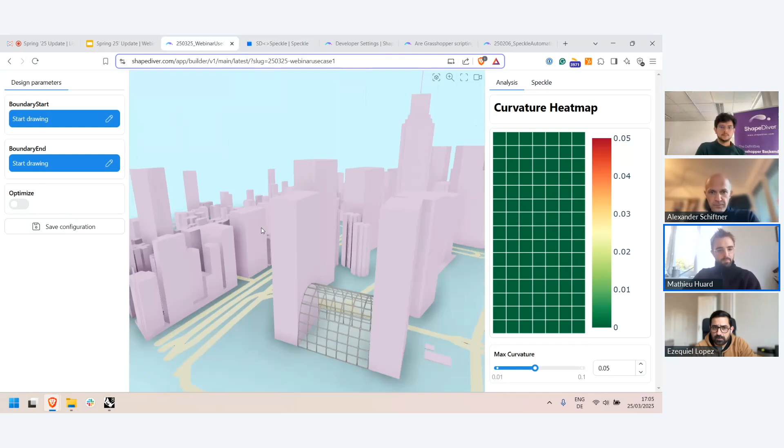So I'll get started with our first example. Here I tried to put together a lot of the things that are new in the last 6 months and a bit more in ShapeDiver. As I was finishing this example, I realized that even though it's a silly example, I hope it conveys all the possibilities we have now. I was actually blown away by how much is now possible just using Grasshopper and deploying the logic as a web application.

In this small application, what I have is this city model with a small pavilion between two buildings, and there are several design options which all revolve around this tensor structure optimization. This pavilion is defined by two curves on the buildings, and as you can see here, I have point inputs which allow me to edit the two boundaries of my pavilion, changing the shape pretty significantly.

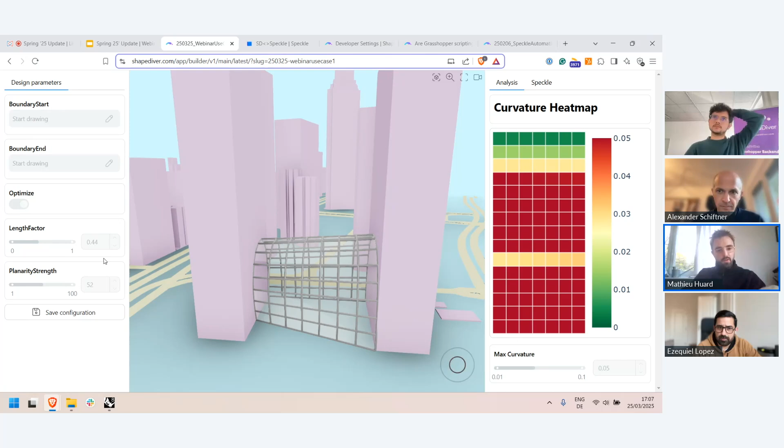And I have an optimize button which unlocks — as you're probably aware, App Builder allows for contextual interfaces — new parameters that are part of my model, which are optimization parameters, where I optimize for the pavilion to be a tensor structure. So I can play a bit with those parameters, and as I play, what I did here is add an analysis tab, which provides a heat map of the planarity of all the glass panels of my pavilion. As you can see, as I update those parameters, we have different heat maps for the planarity of panels.

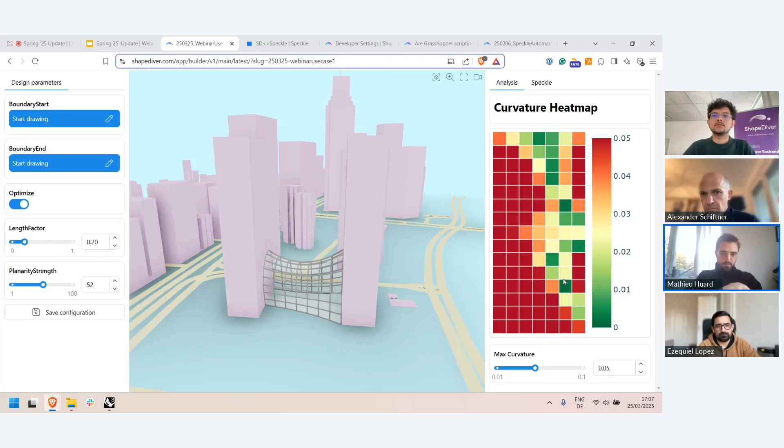And the last thing I have here is, of course, the Speckle part. So essentially, through this design app, I can design a structure which I can then export to Speckle.

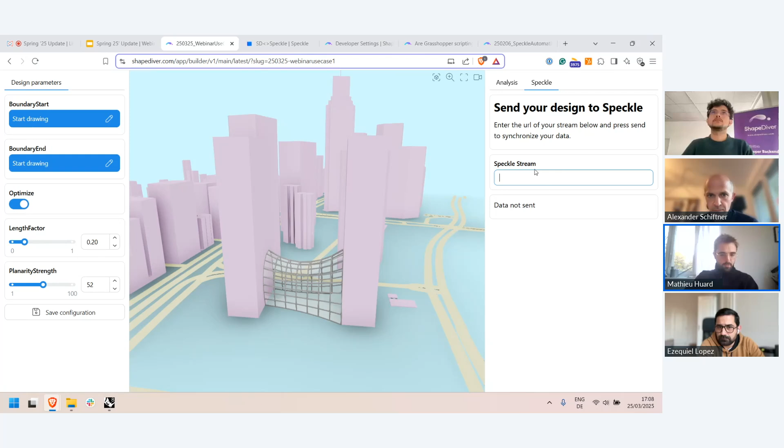And that's in my interface here is done by just giving the address of a stream in Speckle, and then I'm able to send data here. So I'm already going to do this, which will close the presentation of this model, and then I'll go to Grasshopper to look a bit at the details of how all of this is implemented in Grasshopper.

But yeah, the first thing is that here, I'm not sure how familiar all of you are with Speckle, but essentially what I can do in Speckle is have these models, and a model can be updated. So essentially there's data that can be synchronized, so imported from all the connectors that Speckle has or exported back to those connectors, which allows, of course, for interoperability and collaboration on projects.

And in my case, if I create a new model that I call Pavilion, I can then copy the link of this model called Pavilion, and I can go back to my app here, enter the link. My definition checks that this link is valid essentially, and then lets me send data to the model. So a new version, you can send different versions to models.

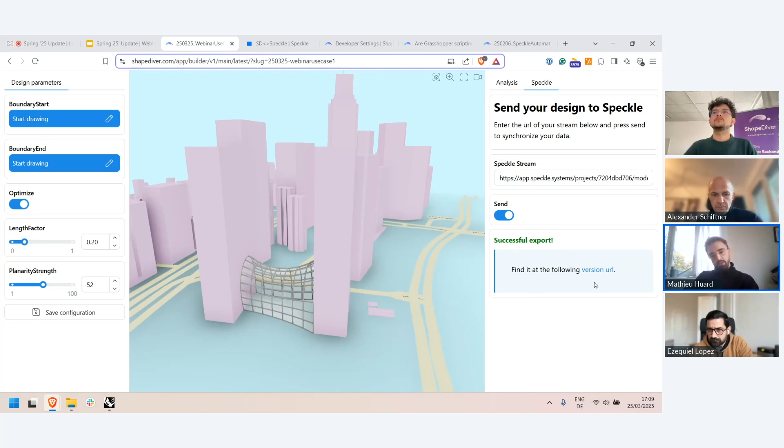And once this synchronization is complete, I can go back. Well, I can directly click here. Essentially, I get in Grasshopper also directly the URL. I'll go back to my dashboard, and I can see here that my model updated with a new version of the model, which is here. I just exported the metal structure of the pavilion. Okay, so that's essentially what this first example does.

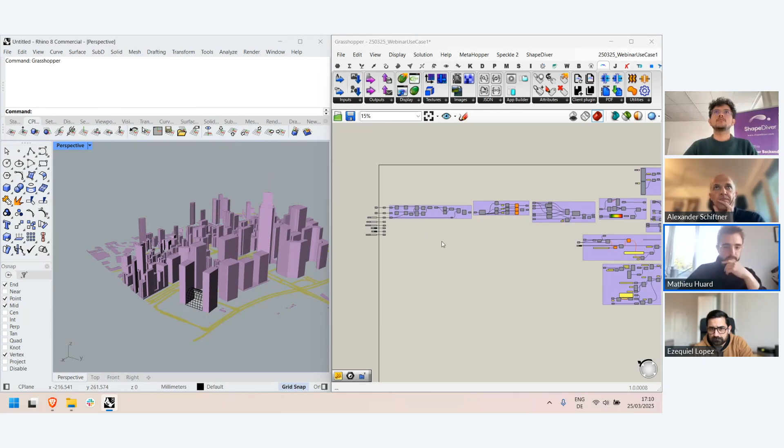And now, if I look a bit in Grasshopper, we can see my definition, which I try to organize as much as possible. And by the way, it will be uploaded to our help center after the webinar, so you'll be able to start from this definition and look at how everything is done here. But essentially, besides the main algorithm here, which takes my curves, designs the pavilions, and then uses Kangaroo to do the optimization, and then displays the end results, right? So here I have my pavilion, here the environment geometry.

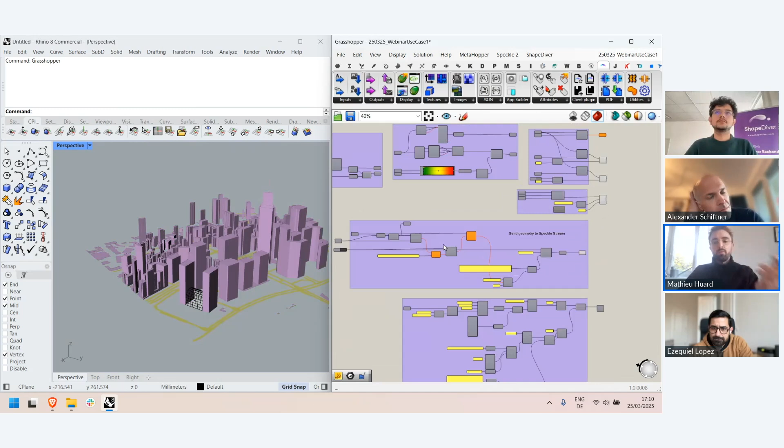But what I wanted to start by showing is the Speckle part, right? So there's a couple of important things to note about Speckle. Speckle is currently in a transition phase, and they're upgrading all their so-called connectors to new versions, version 3. But if you go here in Speckle and you look at the resources, so connectors, you'll see the list of new connectors that can be installed, but the new version of the Grasshopper connector does not exist yet. So right now the connection works with the legacy connectors.

So on this page, there's a way to go to the legacy connectors, which work with this manager. So if you install the Speckle manager here, which is what I have already installed, you'll see the list of the legacy connectors; some of them will last longer, probably some of them will be replaced soon. I think Grasshopper will take a while still. So for now, installing the version 2 of the Grasshopper connector is what's needed for the connection. Of course, as soon as the new version is out, we're going to update our servers and support it as well. But now, if I look at Grasshopper, once I've installed this connector, I can see the Speckle plugin in Grasshopper. And this is what I need to synchronize data.

So again, some of you might already be familiar with the Grasshopper connector of Speckle, and then you know that you probably use the send and receive components in Grasshopper to send data to Speckle models, or retrieve data from models. But as you might know, those components are asynchronous, and also have this interface with buttons. So essentially, you need to interact with the canvas in order to send and receive the data inside Grasshopper. So they're only useful for local work.

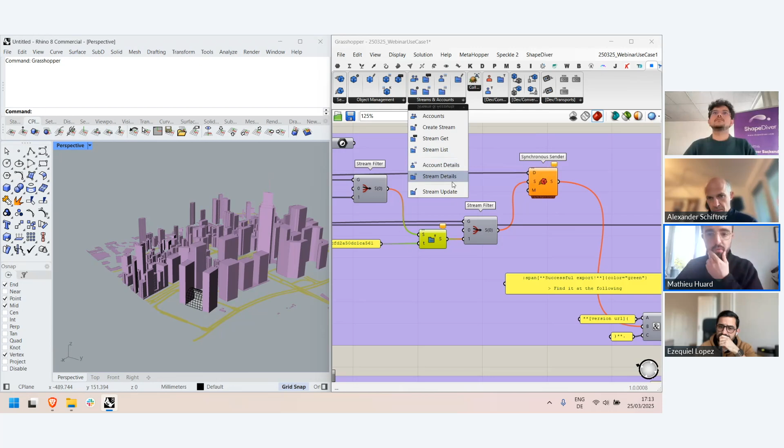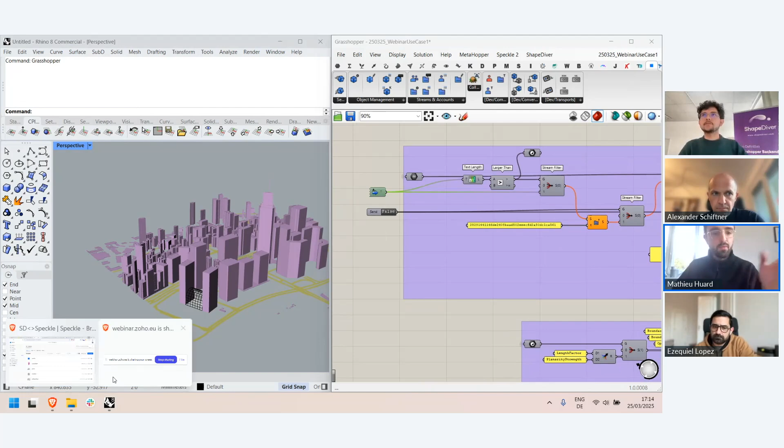The only way that works to do this authentication is to use this Stream Get With Token component, which is part of the plugin. Essentially, this component retrieves a stream in your Speckle account by specifying its link. So the same one that I used in my app here, I can also copy the link and feed it to the Stream Get With Token component, the stream input here. In my definition, of course, I exposed it through a text input, which means that users can directly input their own stream in the app here, right?

The second input of this component is an authentication token, which is the way to authenticate to your own Speckle account through the component, in this synchronous way. These tokens can be generated by going to the settings of the Speckle account, the developer settings here. And here are access tokens. I already created several for my personal tests, but you can create new tokens here and give them names.

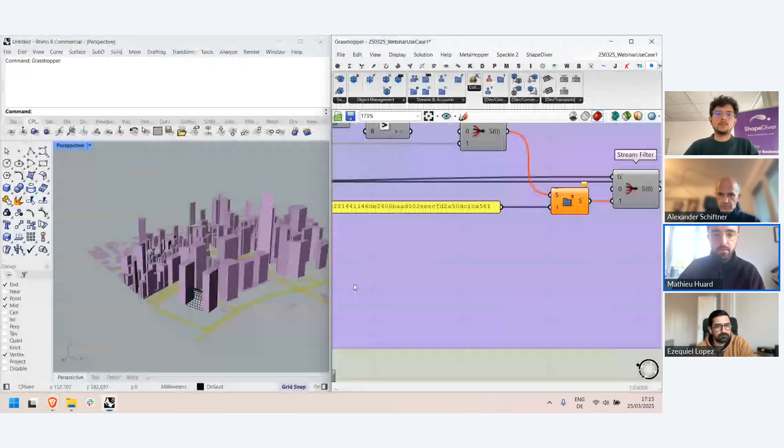In order for the Speckle connection to work with Grasshopper, one needs to enable several scopes here: profile read, streams read, and streams write, which allows Grasshopper to read from the streams of your account and also write new data to streams inside your account. Once it's generated, this string can be fed into this component, which allows the component to log in, and then I can send data using the synchronous sender to the stream, or retrieve data using the synchronous receiver component. So it's quite simple how to send and receive data.

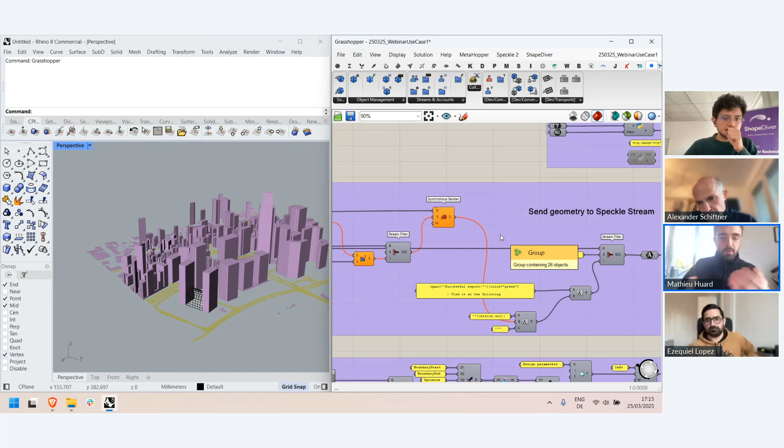It's a nice setup. The only thing here, which the more developer side of the audience might already have jumped in their seats about, is that it's not so safe to handle sensitive data such as API tokens and passwords, and copy and paste them in a panel on the canvas in Grasshopper. That's something we don't recommend in general. And by the way, the Speckle component makes it very clear in all caps that you should be careful and not paste this data in the file itself.

So essentially, not do what I just did. Speckle is one big part of it, but we did this for several reasons, because we also have users that, for example, try to authenticate to their OpenAI account through API keys, or other APIs which require authentication. These users currently need to copy and paste those keys in the Grasshopper canvas. So the idea here is to store this data in a secure place on the ShapeDiver platform and retrieve it in Grasshopper through authentication to your ShapeDiver account, protected behind your account. So I'm going to show how to replace this unsafe workflow with the safe one.

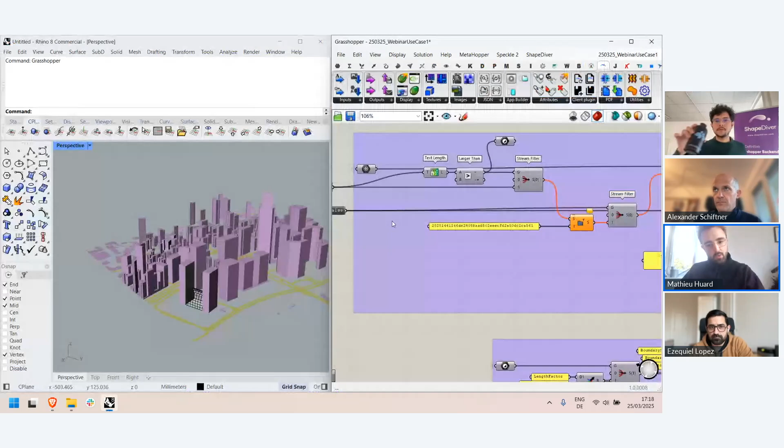So here I'm in my ShapeDiver dashboard. If you go to your settings and developer settings, we have, since about a week now, a new section called Secret Keys for Grasshopper, which is used exactly for that. You can add any data string and give it a name. So here, sensitive password, and here I can copy any password that I don't want to expose in Grasshopper. Once that's done, this is stored in your ShapeDiver account, and you can go to Grasshopper and, as a first step, log into your account.

Here I'm already logged in, but I'm not sure if all of you are aware of this. It's possible to log in to your ShapeDiver account directly inside Grasshopper, a feature already used for several workflows, for example our desktop clients, or the client plugin, which allows you to retrieve and compute data from remote ShapeDiver models. So it works a bit like Hops, but on the cloud, let's say.

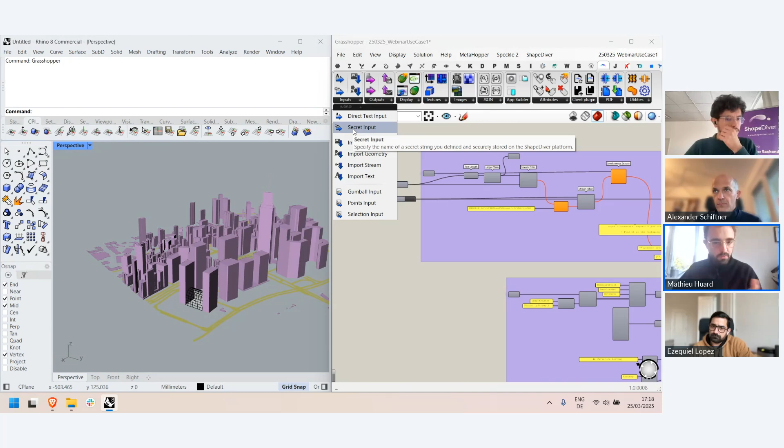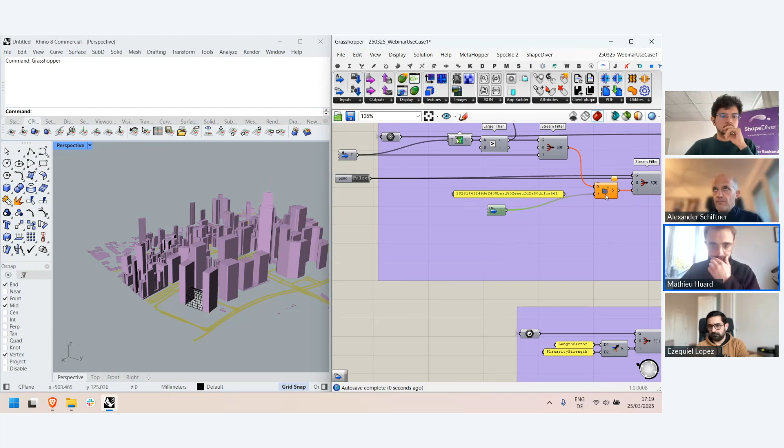In our case, being connected to my account allows me to use this new Secret Input component, which we added to the plugin a couple of weeks ago, and it's used exactly for that. If I add it to my canvas and go to the secret name submenu, I see the list of all the token names stored in my ShapeDiver account. So I can pick one here. In my case, I pick the Speckle token that I stored, connect it directly to the component, and remove this unsafe panel with my sensitive data.

So of course here, since you're logged into your account, the data lives on the canvas because you do need it. There's no way around it. This data is needed in the Speckle key component. It's going to be needed also if you start using any API and use, for example, the Swiftlet component to authenticate to REST APIs. But the thing is that you need to be authenticated.

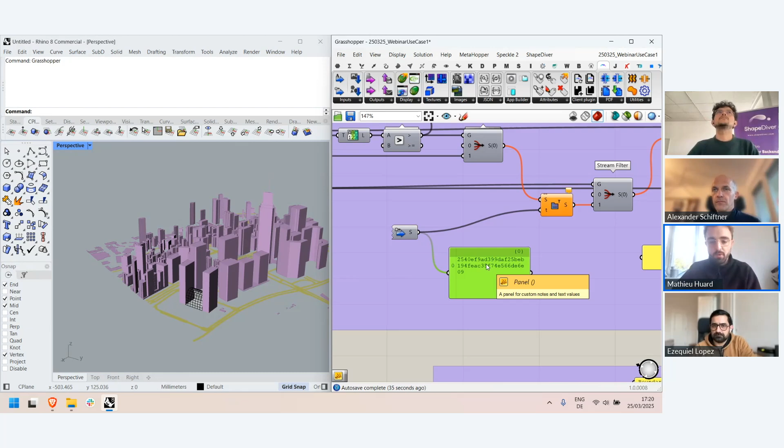So, for example, if this Grasshopper definition leaks or you share it with someone, this component will not be able to retrieve the key, and this person will have to use their own keys or generate it in some other way. All right, so that's what I wanted to show for the Speckle side of things.

I just wanted now to go back to the model and look a bit at the inputs side of things. So lately we've had several ways to interact with geometry directly inside the viewer. I think a lot of you are aware. There's a way to draw polylines, like I've already shown in this model, or to manipulate gumball or to select geometry in the viewer. I just wanted to mention that there's some new features here.

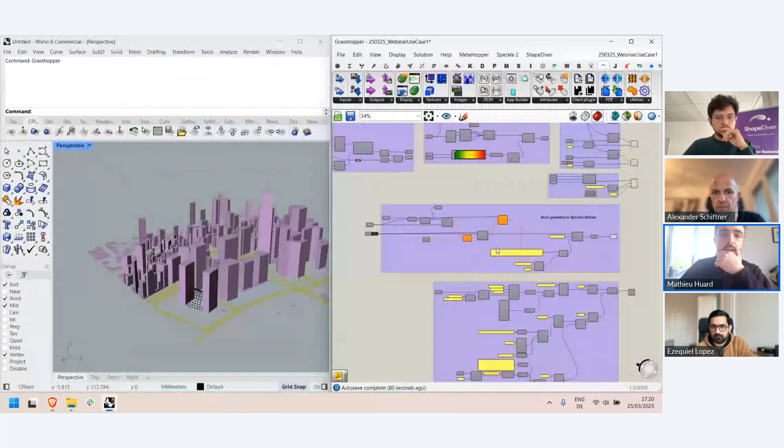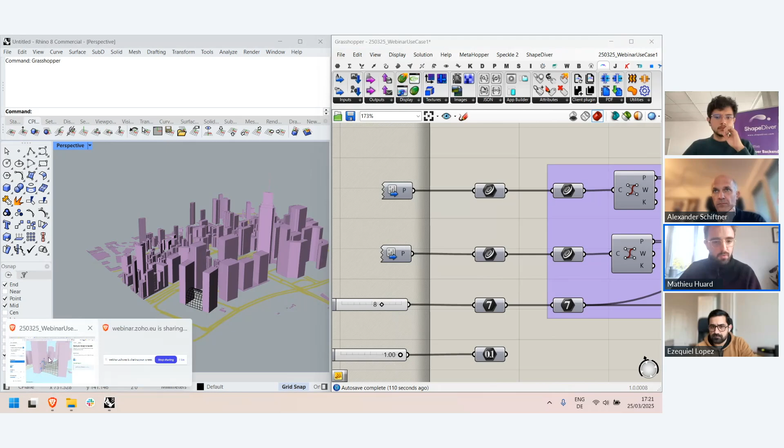So here, in my case, I have these two polylines as input, the boundary start and end of my curve, of my pavilion. And we added the ability here to define the grid units used for snapping points when you edit the points. Before that, there was a grid that was automatically generated in the viewer, but now you're allowed to control this and provide some guides to users interacting with geometry in the viewer. All right, so that's what I wanted to mention about this example.

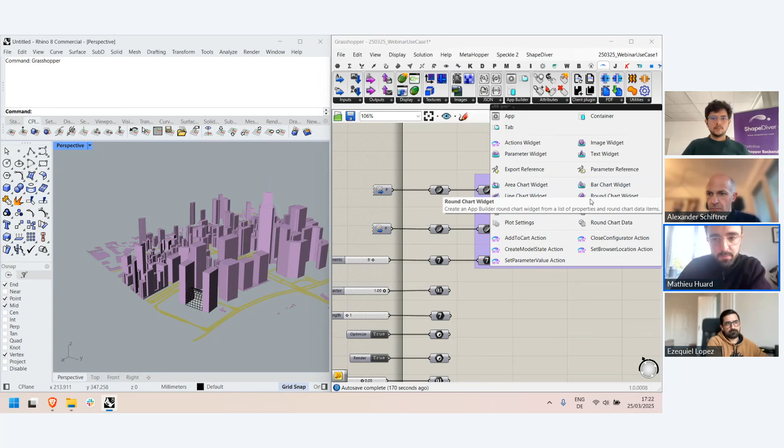No, sorry, I'm forgetting the last part of it, which is this nice heat map, which for some reason here did not render. So I'll reload my app. So this nice heat map here that I generated to show the planarity of panels. If you've been using the app builder, you might be aware that there are ways to generate native graphs, so data visualization elements in apps: bar charts, round charts, line charts, area charts.

In my case, those types of elements were not so convenient to show the data I wanted to show in my app. So I looked a bit further, and I think Christoph, the Grasshopper tutor on LinkedIn, suggested to use Plotly, which is a Python library that's used widely for data visualization. And that was a great way to remind the community that we support scripting inside Grasshopper when uploading to ShapeDiver. And when you're using Rhino 8, the added bonus is that both the C# and Python components support external packages, external libraries.

So here in our documentation, I'm opening the page. That's a current list of packages we support, which is not so big, but keep in mind that we don't have so many needs in our team for these libraries. This list is extended every time users ask for new libraries. In this case, we decided to add Plotly because we thought it would be quite useful to extend the data visualization possibilities on ShapeDiver.

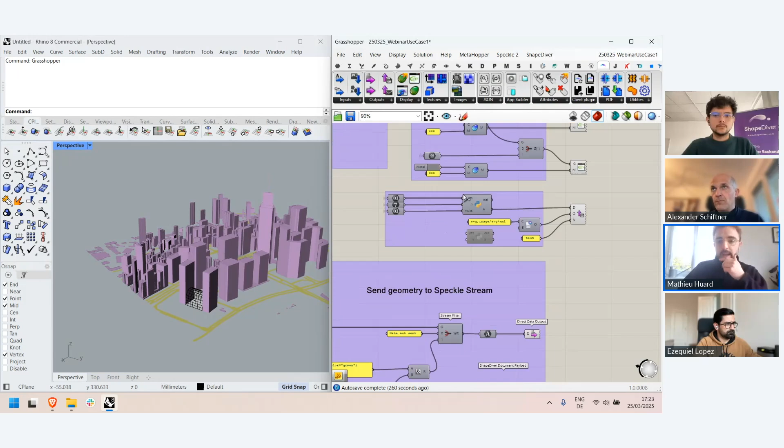And that's why here I'm using the data, the planarity values of all the panels in my definition, and I just have a small script that generates a graph using Plotly. The script uses numpy and Plotly. Just as a comment, on ShapeDiver we support theoretically all external packages as long as they make sense in the context of ShapeDiver and Grasshopper. But they are not all installed. As I just showed you, there's a list of the packages that are already installed by default.

But we still support on-the-fly installation of packages, which can be done with those comments here. So for example, #R, and then if I go look at the Plotly page, Python Plotly, here, if you look at the libraries, you can always see which version you want to install. Okay, so the latest one. I don't remember the syntax exactly. But essentially, you can require the version of the package you want, and the Rhino 8 version of the scripts will install those packages on the fly. So you can still do that on ShapeDiver.

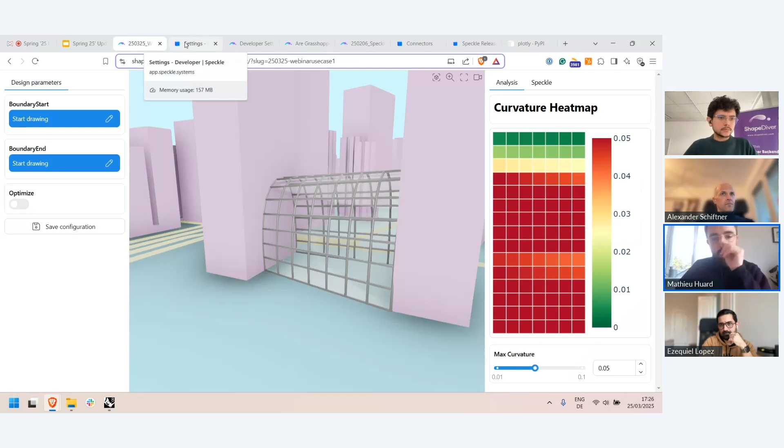All right, so that rounds up everything I wanted to show about this example. And I think actually Ezequiel will show a bit more to introduce some more new features we have before transitioning to another model and the Shopify example. All right, so Ezequiel, I will stop sharing.

Thank you, Mathieu. And just to remind everyone, everything that you saw was entirely using Grasshopper. There was no extra line of code needed. I mean, besides obviously the Python thing that you might need to complete the model, but everything you saw on the final online application was entirely using Grasshopper, using App Builder from ShapeDiver, right? Previously, 1-2 years ago, you would have needed to use web development, our APIs.

You probably would need cross collaboration between teams, the computational designers, the software developers. Now, all computational designers are empowered to finish the entire project on their own without needing support from external teams, which we believe, and we've seen since we introduced App Builder, accelerates projects that actually are finished because the computational designers can complete the project on their own, right?

So we encourage everyone, just like Mathieu showed today, to try all of the new features that we're adding to our App Builder. The drawing tools, super useful. The gumball, we didn't show it today, it's also super useful. Clickable elements, all of these things are available as a Grasshopper component, part of our Grasshopper plugin already. So if you install the latest version of our Grasshopper plugin, you will have all of those components that enable you to activate these features in App Builder.

We have maybe a quick question that you can answer here, Mathieu: can we display this kind of heat map graph by using native components rather than Plotly? Not yet. So that's the point of us extending the support of libraries in Python and C# and support of scripting in general. We use that a bit to bridge the gap, right?

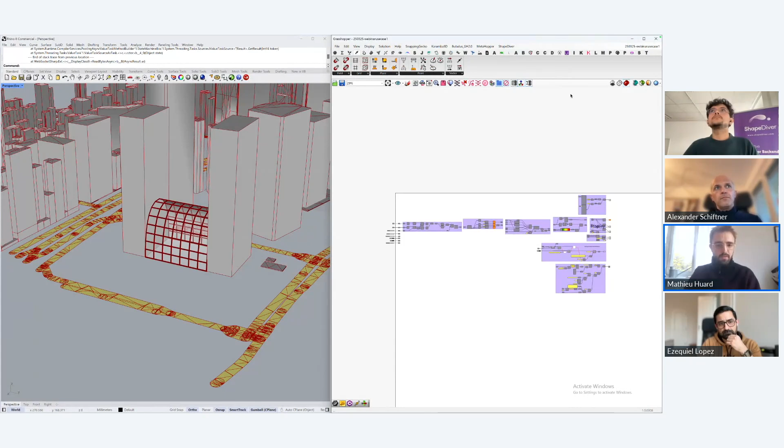So the App Builder framework, as we developed it, and Ezequiel is currently showing the list of components we have, we're constantly expanding it, right? At first we only had a couple of widgets to display images, text, parameters. We added the charts. We added some actions, which Ezequiel will show in the context of Shopify. And we're gonna add more, right? But there are so many different use cases that we also wanted to make sure that some flexibility through scripting components is available.

But in the case of the heat map, the example is there. As I said, I'm gonna share it in the documentation. So if you're interested in heat maps, the script is already there and you can use it as I made it. Okay, then I will get started.

So just to finalize that question, basically without the scripting, you can see on the screen which components create which kind of charts. So you have area charts, bar charts, line charts, and round charts. That you can do without the scripting. Beyond that, for now, you need to use the scripting.

Or actually, I made a LinkedIn post not that long ago about a plugin that we also support that doesn't require scripting, that is called GraphicPlus. So if you look in the package manager for GraphicPlus, that allows you to create all sorts of graphics. You have to build it on your own, step by step, but you can parametrically create any graphics that you need and also display them through App Builder in a web app just by connecting that output SVG file.

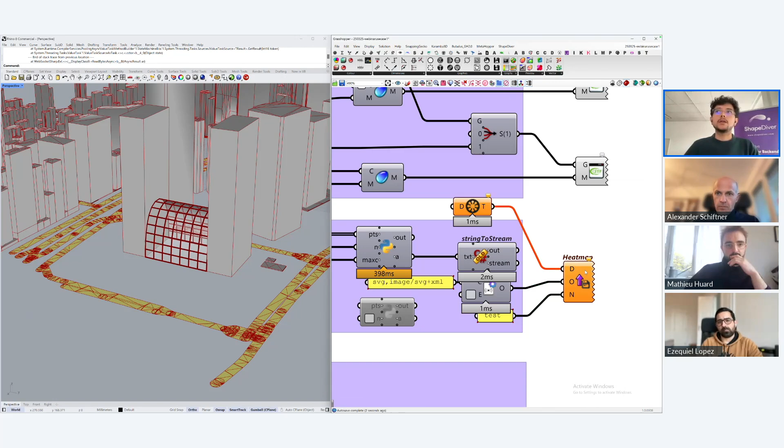So here in the output, you have an SVG file. This one also has the option to output an SVG file. And then that just comes here. There you get the parametrically created graphic, and that's what you will then display in your UI via this image widget. So the image widget is part of our components in Grasshopper App Builder. Here we have the image widget.

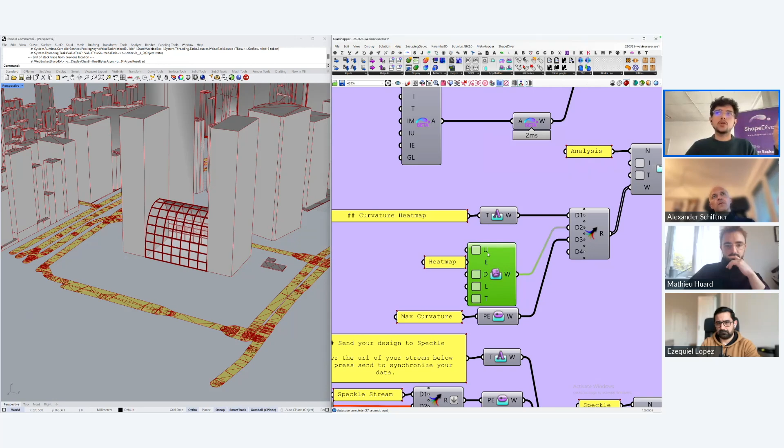And then one option is you put a URL, which means a static image, or another option is you put an export name, so one of our export components, and that means it's an image that is generated on the fly, then that goes into the widget, and then that gets displayed in the UI.

Okay, and another thing, I just wanted to help Mathieu at the end with this syntax. That's in the Rhino documentation, where you can see how you can install these external packages and what the syntax is to do that. Okay, now I really start with my part.

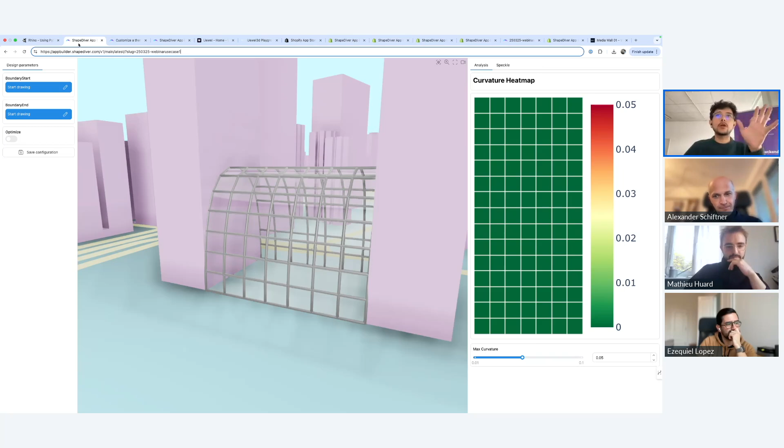So my part is about, well, I'm going to start with this model that Mathieu created. And I'm just going to do some changes here. So if I start to move this, as Mathieu showed, then I go confirm.

And then, okay, I think the problem here is when you put it down. So let me try again. I'm going to edit the top one. Then I'm going to edit the other side, let's say somewhere there, somewhere crazy. And then let's say I want to optimize this.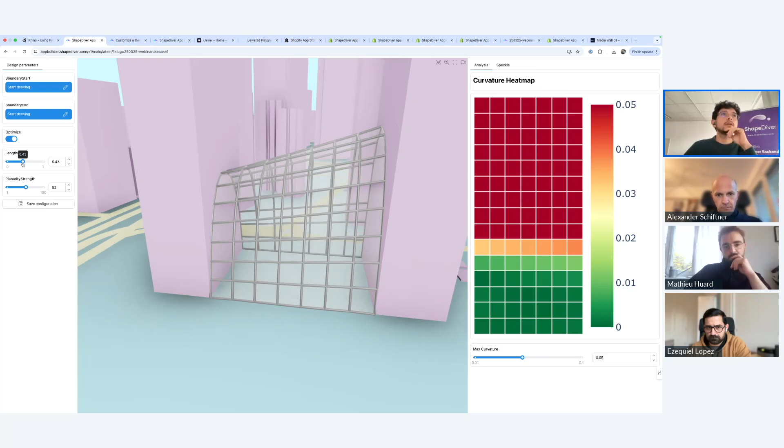When I optimize this, this is using Kangaroo, so that's why it takes a bit longer to compute, because Kangaroo is trying to see what's the best way to optimize these panels. Then let's say I change the length factor. And then after I do all of that, okay, let's say I'm happy with what I did.

Now I want to share with somebody. How do I do that? How do I save all of these steps that I did, all of these changes that I did, and don't lose this data, and I'm able to share that with somebody? And that's done with this button that you see here. So if I save this configuration, that will create an ID.

You see a notification here that says this ID was created, but you also see here the URL has changed, and it was automatically changed adding this ID. So now, for example, if I copy this and I share it with my colleagues, I can just paste it here. Then I will be able to see the model starting from that step that I saved. So that's one use case for save states.

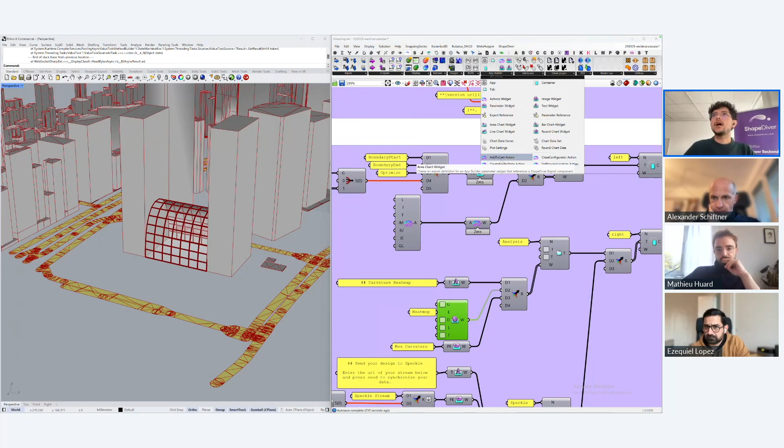The way you add this save configuration there is with an action. So in Grasshopper, if you go to the App Builder section, you have here the actions. We are still in beta, and here you have the create model state action. And that automatically generates this save configuration section there. So I think that one is this one, yeah.

So basically, it's just this component, a create model state action component, that goes into, in this case, a tab. The tab is called design parameters. So I see here there is a tab called design parameters. And then that goes into the left container. So I'm here in the left container of my app.

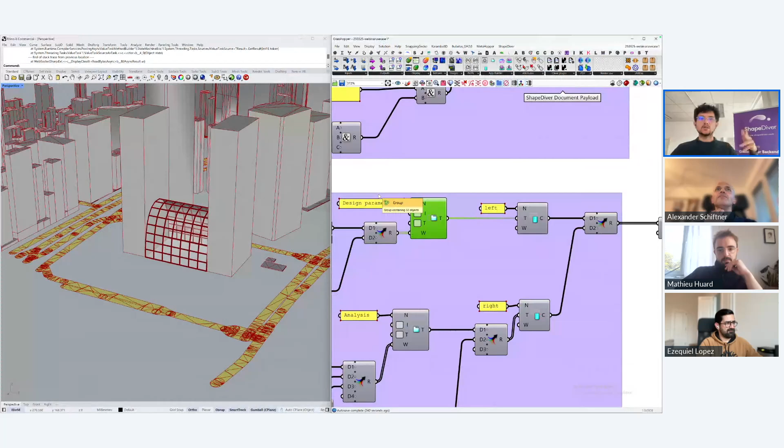So it works like any other parameter. I just need to show exactly where I want this action to be positioned, in this case, the save configuration action. And that's it. With that, you will be able to click on it and get this ID. That's one use case.

Okay, another use case of saving these configurations is, for example, let's say I want to change this a bit more. There was an option. And maybe I won't be able to do it here, but basically, let's say I like what I'm seeing right now, but I want to now continue my work in Grasshopper, or maybe I see an issue in the model and I need to find out what's happening.

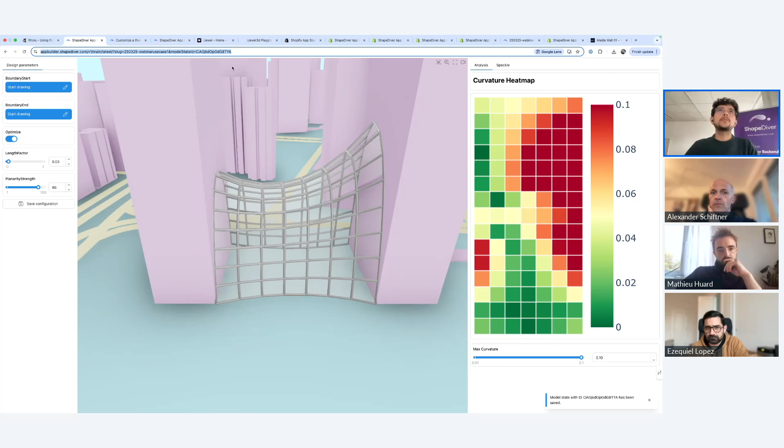Now, basically, for debugging this specific state, or to be able to continue the work with this specific state, I can first of all save it. So I have now my new ID. I can just copy this URL. I go back to Grasshopper. Here you have a new tab called ShapeDiver.

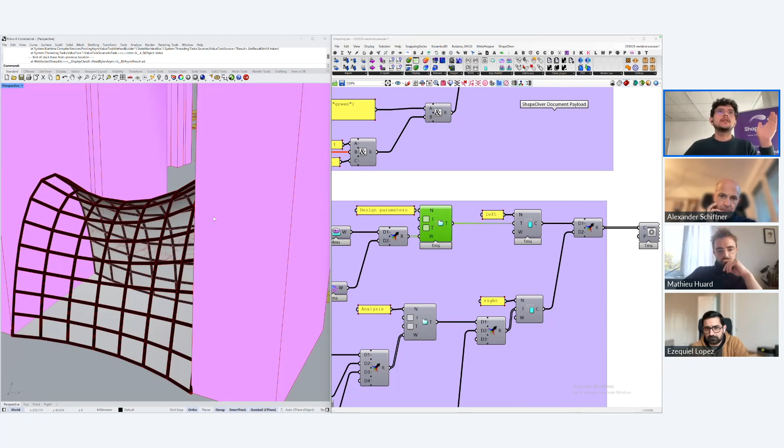Go to parameter values, and here it says load from state. I just paste there my URL, the one that I just generated. I say OK. That will go to our servers and call all of the parameters. Here it's telling me, OK, all of these parameters will be updated. I say close. And then that's it. Now I have exactly what I have in ShapeDiver also in Grasshopper.

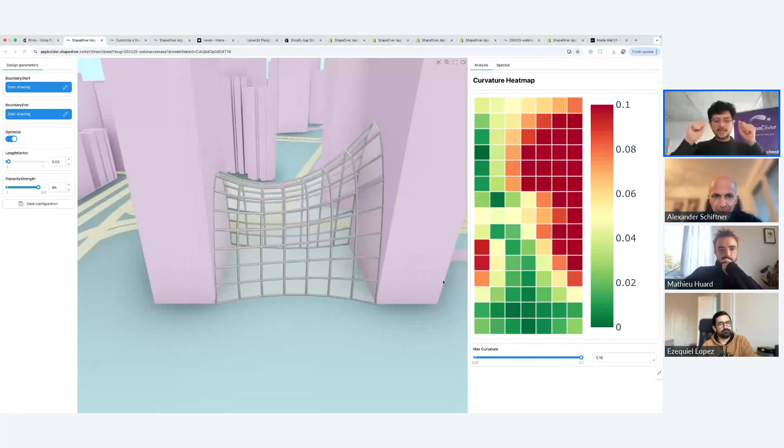So from here, I can continue testing maybe why this planarity cannot be further improved. What could I do to make this more planar? So maybe I need to do some changes in Kangaroo. And in that way, you can easily continue your work between ShapeDiver and Grasshopper by using this model state ID. Okay, that's the part of the saved ID. I will share more about it later in the webinar.

Now let's say that I like how the configurator works, but I don't like how it looks. Maybe the brand of my company has different colors. Then I want to be able to change all of these colors. For that, we have something called themes. Here is our documentation, help.shapediver.com, and we explain all about themes.

Basically, themes are a JSON file in which you store all of the colors and all of the different CSS formatting that you want for your app. All of this is done through this library, Mantine. So theoretically, whatever is supported by Mantine, we're able to also support, but not all is exposed. So if you want something specific that's still not exposed in our themes, you can just let us know, and then we can let you know whether that's in our priorities or how that could work.

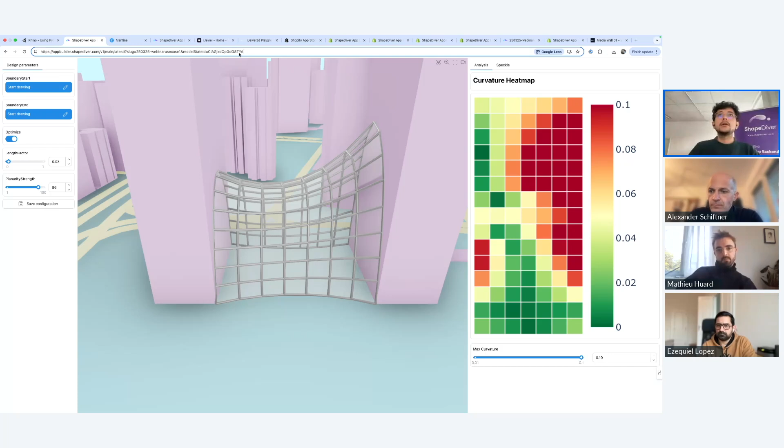Basically, we have mapped that into a JSON file that we read automatically in our app builder, and we change in that way how the UI looks like. So, for example, if I come here, that theme is created by adding a query here. In this case it's just G, and then I put equal. And if I do it like this, then I have some saved ones here. So it's just a JSON file that I have saved on some server. I just have the link of this JSON file, then I put that as a query called G, and then I just load that.

Now we have different colors that I defined, so when I hover, I get this color, for example. I can show you another example of another option, so for example this one. Now you can really change how your app looks by changing colors, and for example, if you see here, the buttons are squarish, whereas in the original one, those buttons were round.

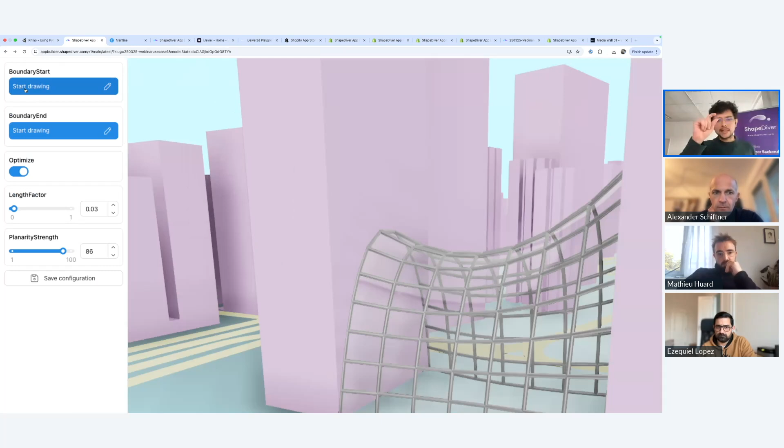So these little details, which normally are more meant for the brand of the company, how your website looks, should then reflect how the app builder looks. So these kinds of things you can change quite a lot by using this JSON formatting.

We are working on how to make this JSON easier to use, easier for you to edit. Maybe we'll use LLMs for you to be able to create this on the fly, or other ideas we have of how to make it. But for now, you have an entire documentation here in our help center where you can learn how to use this theme. You can use ChatGPT yourself, feed it there and say, now I want these colors, and probably ChatGPT will do everything for you. But at the end, you just upload that JSON somewhere, and then you change your theme.

Okay, now I want to open another example. This is now a ring, so a different industry, jewelry. And here I'm going to try another theme that I have saved as well. So it also looks different. Now I changed my UI, but now I want to change also how my model looks like. In this case, we have jewelry, so I don't see my metals, I don't see my stones looking nice. So how can I improve that further?

One way is, of course, using our components, where you can create your own materials, as it has always been. But now we're working on some integrations.

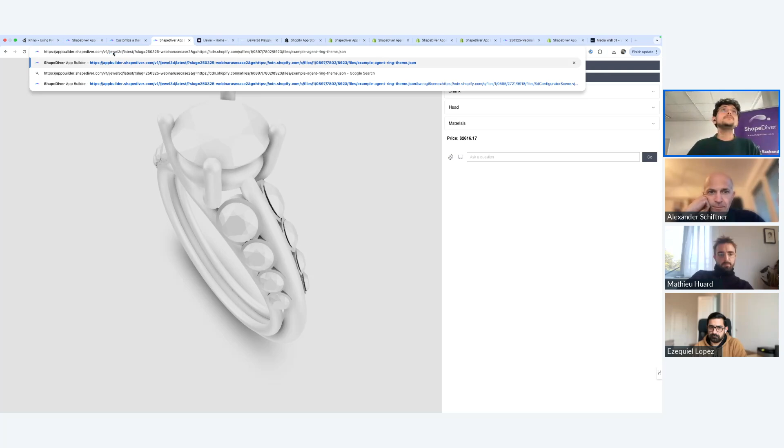So if, for example, I just change this - I hope I write it well, otherwise I'll just get it from somewhere quickly. I had it here saved. Yeah, so if I just change the main branch to iJewel 3D, then we will see that now we have a nice rendering.

And the reason why now we changed all of a sudden from this completely gray model to a completely, let's say, rendered, ready model with stones, metals, etc., is because we're using now a different viewer. We are not using the ShapeDiver viewer, but we are integrating ShapeDiver with Grasshopper in the background, so a completely parametric model with external viewers. In this case, we're using the technology of iJewel 3D, a company that specializes in rendering of jewelry. That's their only goal, to make the best rendering in jewelry. So of course our viewer is focused on being a general viewer for all sorts of industries, while this one is specialized specifically for jewelry. We just connected what they have created to ShapeDiver, and now you can get the best rendering there is online for jewelry in this case.

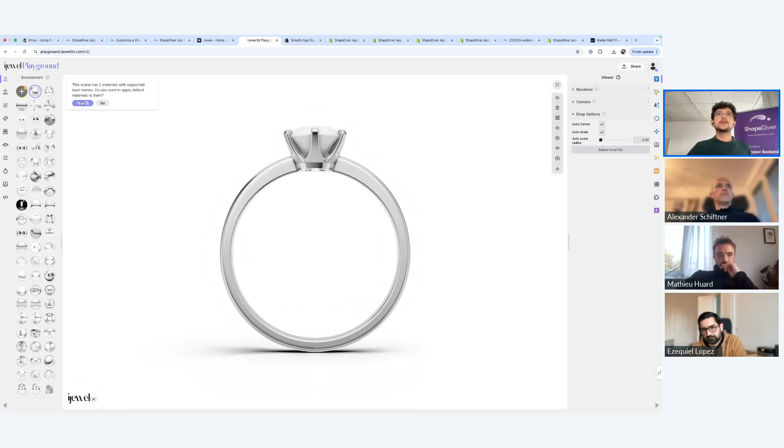They also have a playground, so here we have playground.iJewel3d.com. They have now version 2. In this playground, I can either drop my own model, or they have already some prepared models here, and some presets where I can preset all of my materials, play with them, and see what would look better. So they have an entire library, making it easy for jewelers to set up their jewelry.

As soon as you are ready, you can save all of what you've done into a JSON file, which is generated automatically. Here in the exports section, you can get that JSON file and make it even look better.

For example, if I reload this again, you'll see the model loads with a kind of weird camera view, and I don't have a ground here. All of this is part of the viewer, and you can change all of that in the playground.

You can also add that here in the URL as a WebGI scene, and then if we load that, now we have a nice camera, a nice ground, and even some reflections in the ground. All of that you set in this playground, you save it, and then you can use it with ShapeDiver, now giving you a complete parametric model looking sharp.

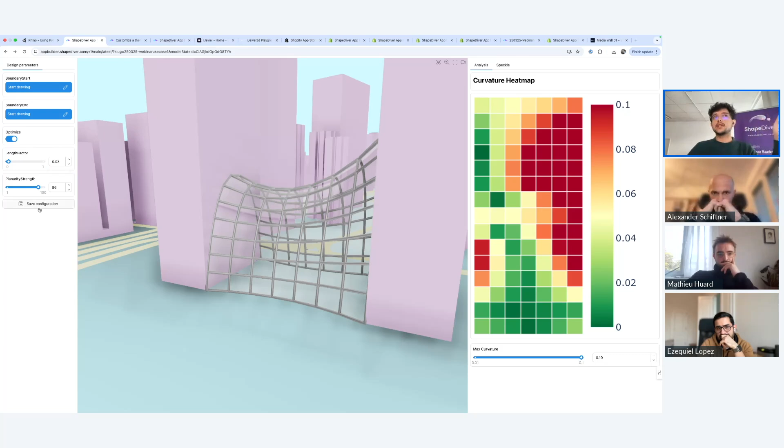Here we also have the same option, in this case called share link, but it's the same action we had before to save a model state ID. So if I share this link, it's basically just creating this ID, which I can now share with anybody. It's the same feature I checked before, which in that case we called save configuration. Here it's called save link, or share link, but it's the same thing.

Okay, now we have all of these pieces: iJewel, all of these saved IDs, a theme. But now we want to pack this in a nice way so you can use it easily. Especially for jewelry, you need to use this for selling — you want to sell your jewelry. So what's the best way to do it?

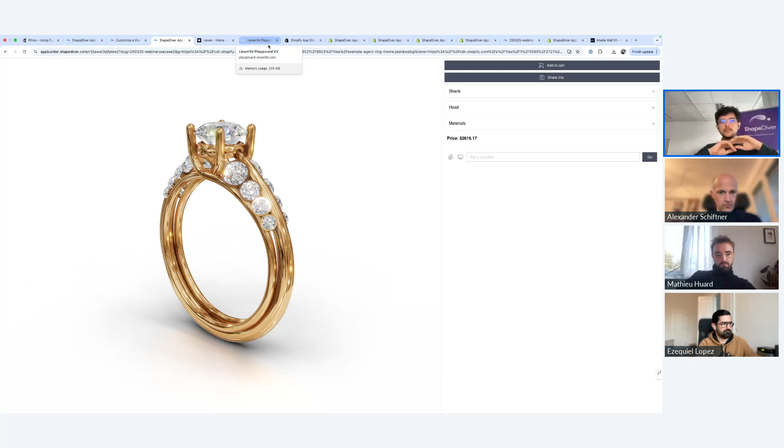Through an e-commerce platform, and one of the best e-commerce platforms nowadays is Shopify. That's why we created our own Shopify plugin, where you can take everything we've shown, which is completely independent from Shopify. You can use all of this for AEC, furniture, whatever industry you're in. But if that industry requires some e-commerce integration, you can do that easily through Shopify.

So if you go to apps.shopify.com and look for ShapeDiver, you'll see two options. Select the official one, and here you can install our plugin. The first thing you need to set up, of course, is your billing — you can go to billing and set all of that up.

When you're ready, you have a starting page with all the links and documentation to use the Shopify app. If we go to the setup section, our CTO created a very easy step-by-step guide of what you have to do to connect your ShapeDiver account with a Shopify account.

So everything gets connected, and when you're all set up, you can start adding your products. When you're done with setup, we go into the settings section of the Shopify plugin, where we can start feeding in all the little parts we were checking — for example, the theme.

The theme is a JSON file, just a URL, so now we have a field here for the theme. The theme we were just adding into the URL before, I can now add here in this Shopify section.

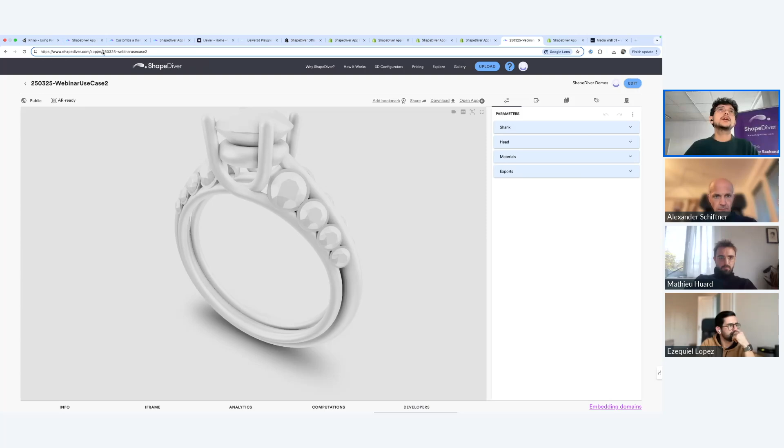In this case, I have this model that I showed before, and there are two ways to connect it. I either use a slug - if I go to this link in ShapeDiver, you see up here I have my slug, so I can just paste that here. Or I can use the embedding ticket and model view URL, which you find below in the developer section. You get a ticket and a model view URL, you can paste that there, and that will connect to that specific model you uploaded into ShapeDiver.

Then you can access here all of the global settings. So all of this part that we set up can be accessed for specific products. I can say, okay, for this specific product, do I want to connect it to my global parameter or not? If I say yes, then I'm going to use the theme of my global settings. The same happens with the configurator URL and the other parameters that I already explained. When you are done, then you save.

And then if we preview this - I think I forgot one more step. You have to enable the configurator here. Okay, let's try again.

So when you enable the configurator, you get this extra button. That's our part, when you go to any Shopify store, our part is to get an extra button that says configure. You just click on it and that will automatically open App Builder. So if I click on it, I will open App Builder, and that's it - I can just start using my model in Shopify and selling in Shopify.

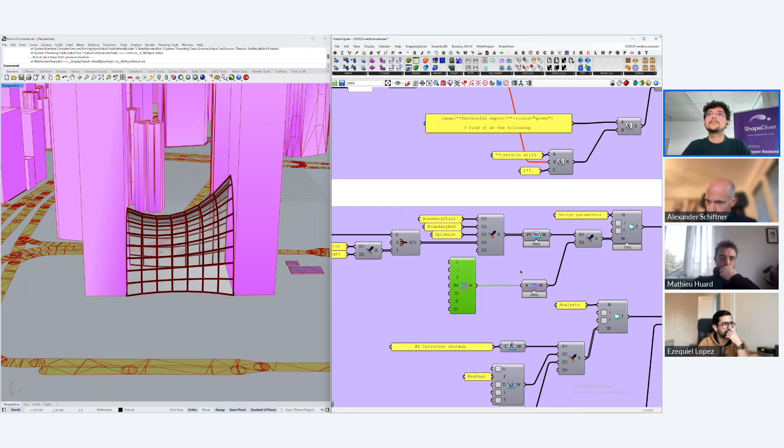If I go into the Grasshopper model, this parameter, admin mode, is also here, and what this does is it gives me extra access to other things in the model.

For example, if I open this model - I think I have to do one more change here, just that - and then if I open this model in testing mode, here you have an option to open it in testing mode, not in the store, because in the store you don't see the actual App Builder URL, whereas this one gives you the App Builder URL, starting with App Builder, which gives you all the link I showed before, how to set it up.

And here at the end, I can say, okay, but I want to access this. You can see that was added into my URL, this admin mode option, which is just a parameter in my model, and I can change that to true, and I get some extra options in my model.

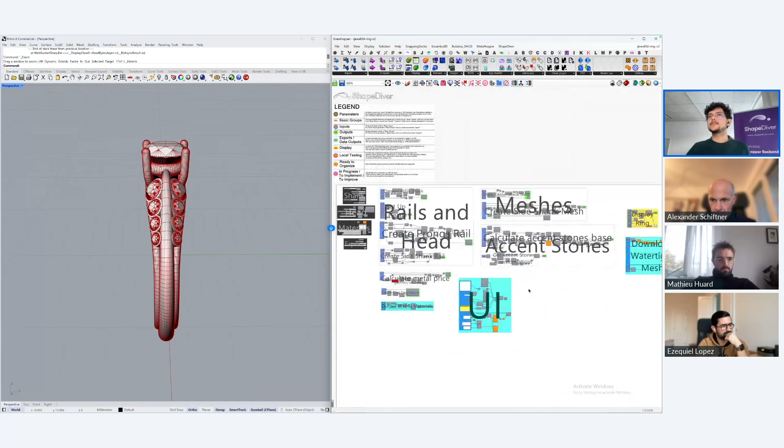In this case, this extra option is the option to export. I want to export the watertight mesh of this model. So if I process this, then that will process my component here - it's the component that is shrink wrap, something new from Rhino 8, a very powerful component that gives us a completely watertight mesh.

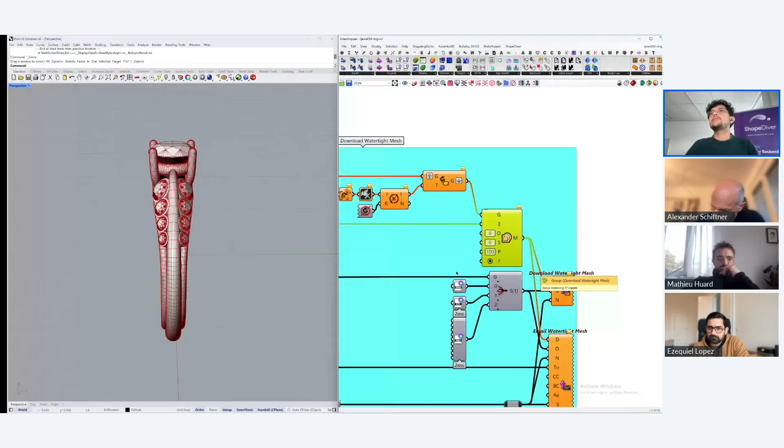So if I process that, I can say, okay, I want to export this as a 3D file, as an STL file, as an OBJ file. All of these are parameters that exist in my model, parameters I have here that I decided while creating my UI - I decided these specific parameters are just shown when I am in admin mode.

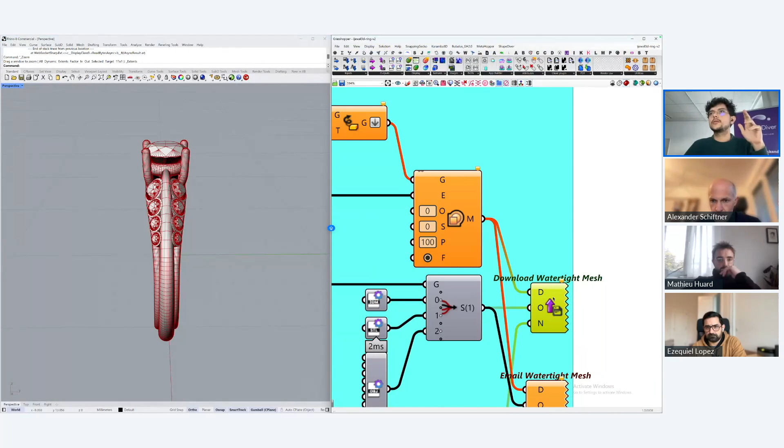I don't want my clients in Shopify to be downloading this watertight mesh. I just want to do it myself, or I want to maybe send it to somebody - that's the second option I have here. I either can download it directly with the download export component from ShapeDiver, or I want to email it to somebody with the email component from ShapeDiver.

So if I want to email it to somebody, I can put here the email. Let's say I want to send it to the person that is going to 3D print it. So I put here the email of the person, I send the email, and that email will contain this mesh. For now, I will just download the file. Here we have it. I will open it here.

So here we have a preview of this watertight mesh. So all of these parts, all of these connections through the shrink wrap component are being solved by the shrink wrap, so that everything is a single object, a single watertight mesh. This is even more powerful when we then connect this with model states. So again, with saving configurations, what we were doing here.

Why? Because the user, when they are in Shopify, they will order one of these rings. So if we go here to this model, I can start to change my ring. Let's say I don't want accent stones. Let's say I want a smaller center shank. I want a smaller head as well. Let's say I want an emerald instead. So you start to see all of the changes. I'm done. I also calculate the price here.

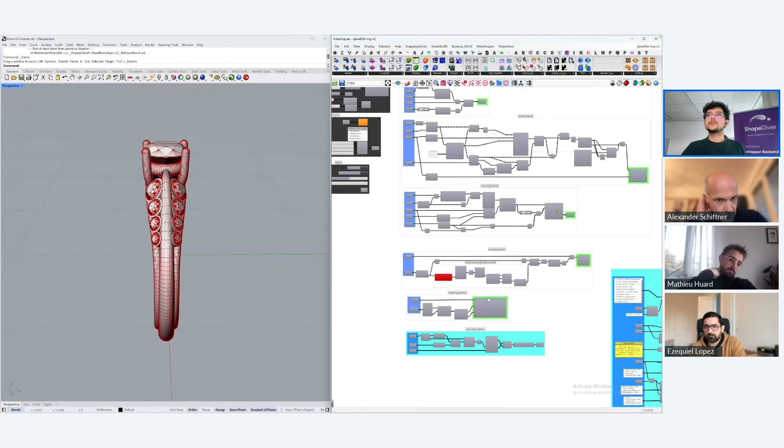This price is calculated also in Grasshopper. So here I have all of the calculation of the price, taking the price of gold, for example, multiplying it by the weight of my gold here, so that I get the price, and I have a price per accent stone and per head stone. Then I get a final price, and then when I add to cart, I get a notification that it was added to cart, and then I get here in my cart that this ring is already there.

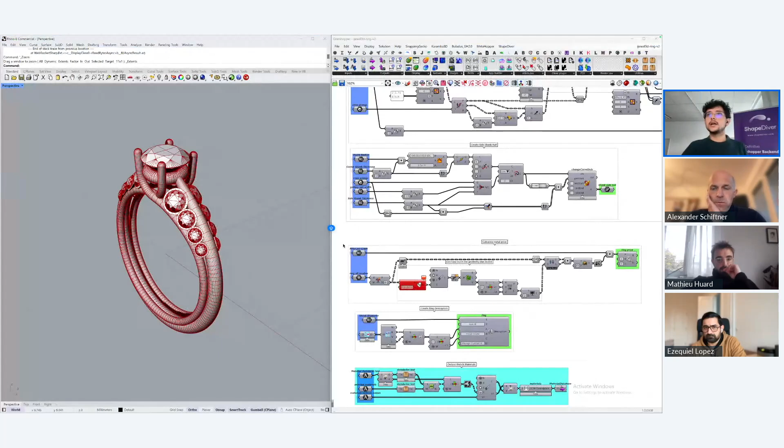How did I get that into the Shopify cart? Through another action. So if I come here into the UI, I have used here the add to cart action. It is here, add to cart action. And in this one, I'm just giving it the price, so that Shopify knows how much I am going to charge, and a description. This description is the one that you see also here. I see here this description, and I say, okay, this is how much I'm going to charge.

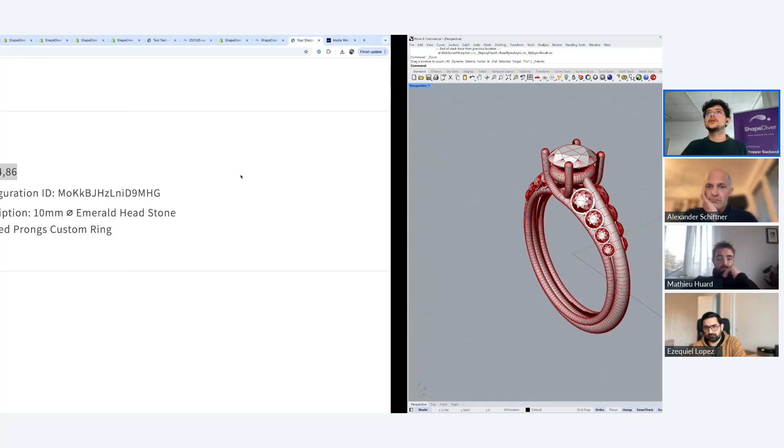And additionally, this component also automatically generates a model state ID. So it does the same as our model state ID action, but with Shopify, by adding it to the cart and showing all of this extra data here. So that's what you see here. I now see a configuration ID. And if I click on this configuration ID, that jumps into my specific product again, opens the app again, and now I see the exact same thing that I did.

Let's say maybe I forgot, maybe I want it to be smaller, or I want to do extra changes, so I go back into it, and I can do other changes, and again add it to cart. But now I have this ID, and what can I do with this ID? All that I said previously. So I can come here and I want to add all of this into my URL here.

So now I can access this ring that I just created in Shopify, but in dev mode, in the admin mode, I call it here. So now I can process this watertight mesh, or I can download it, send it to somebody, or something like that. Or I can also take that exact URL, come into here, parameter values, load from a state, paste it here, say okay, that will go to our servers, get all of the data that needs to be changed.

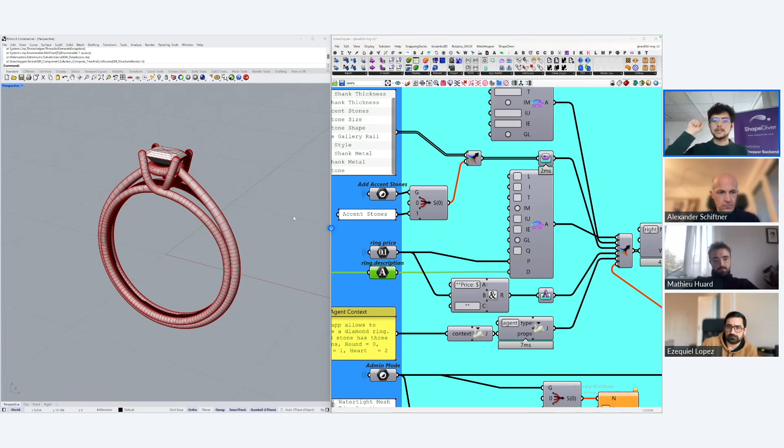I close. And now we have exactly the same thing that I have in Shopify, exactly the same thing that I had in App Builder. Now I have it in Grasshopper, and I can move forward from there. Okay, so I think that's it.

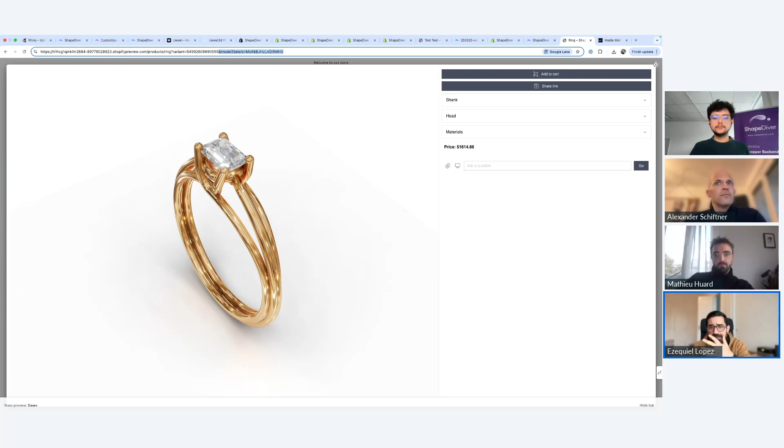There is one question, Edwin, by Rodrigo Lopez. Are users able to reload the save state in the configurator? And I think you just showed the answer to that question. I'm imagining, Rodrigo, that what you're asking is, if I am a client and I'm using the configurator, can I reload previous save states that I saved and added to the cart? And I think that's what Edwin just showed. You could add multiple models to the cart, and each of those models will have its own configuration ID that you can jump to if you want to change something from that order.

No, I think that's exactly what you just showed. Yeah, I mean, this ID basically saves the pair of names and values, or IDs and values of each parameter that you have in your model. So now you can just save that ID, and that's what you can use for whatever you need it to load it in Grasshopper.

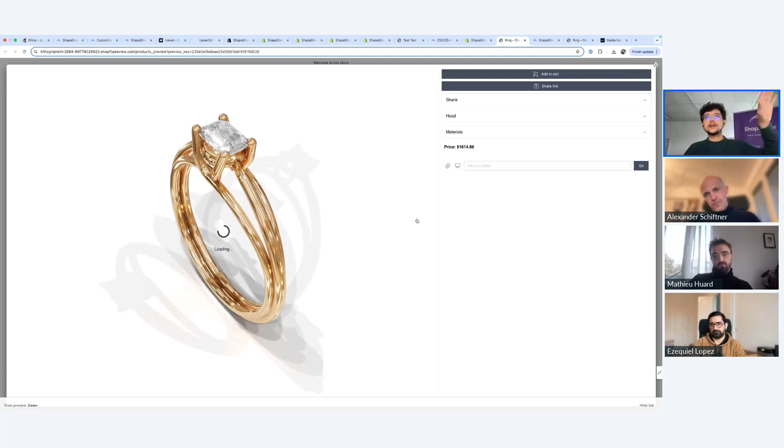Or even another thing that I forgot to mention here, even if I'm configuring a product, I can add the slug, but I can also add a model state ID. So I can have multiple products in Shopify that use the same Grasshopper model, so the same slug, but they have a different starting point. So for example, here, if I use the one that I just created, and I save these settings, when I open this model, instead of using the default model, now I'm using the model state also as my starting point.

So you can have, like, I don't know, 100 rings, all of them driven by the same Grasshopper model, but different model states, and there are 100 products in Shopify in this case, but all of them manage to do the same thing. Yeah, that answers the last question we just got, to link multiple Shopify products to a single model. Correct. You do that through here, model state ID.

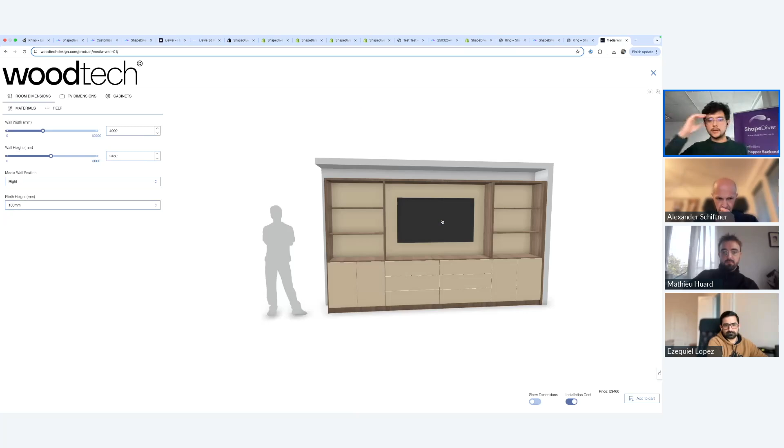And the final thing that I want to show is another example of a client. It's Woodtech. And this company also already has an e-commerce integration. Same thing, you see a configure now option there. Now they have taken this to the next level. Now in this case, furniture. So there are many things that you can do here, which all rely on what App Builder is capable of.

So for example, here I can go to cabinets and I can say I want to select an exact cabinet. So I want to select this one. So all of these are the clickable elements that Ezequiel was mentioning, all of that driven through Grasshopper. And then I can say, okay, now I want this cabinet to be this length. I want this to not be shelves, but to be drawers, for example. And then in this case, I don't know why that didn't work. But you can change there anything that you need to.

Let's say you have a mirror option here. Yeah, so all of that changes the model. And same thing, you add to cart. When you add to cart, all of these prices are being calculated also in Grasshopper. This gets added to the cart. And also you get a model state ID, the same thing that I said before. And you also see that this one looks very different, because they have their own theme, their own font, their own everything. So it's App Builder, it's all the same technology in the background, but using all of the features that I just explained.

An additional thing to mention about this is that this company is actually not using Shopify, but WooCommerce. They're using, in this case, WordPress. So we have an integration for Shopify, but we also have an integration for WooCommerce, which is WordPress. So if you're using any of those two platforms, we now support them for your e-commerce store.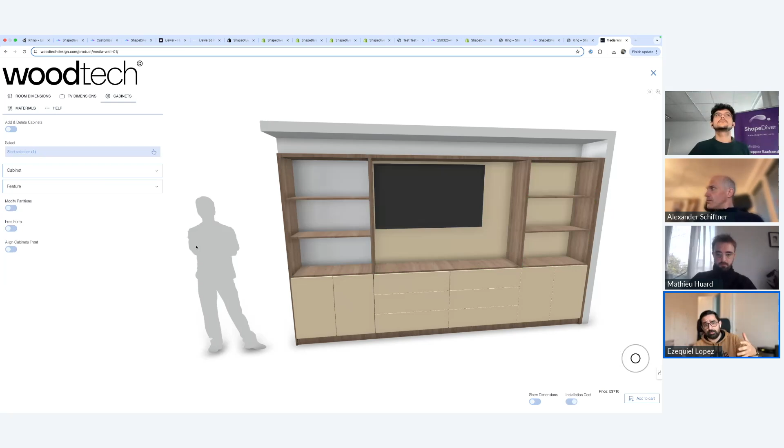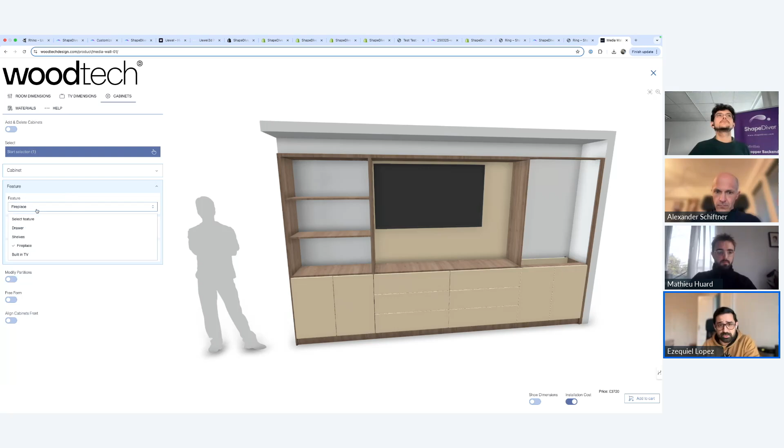If you guys want us to give you a private tour of it, an explanation of everything that Edwin just explained, we can definitely do that, right? But again, just showing that this is almost entirely, maybe just the Shopify theme, the theme that requires the JSON, but it's super easy with ChatGPT, what Edwin mentioned, to adapt the UI. Other than that, it's literally just Grasshopper, right?

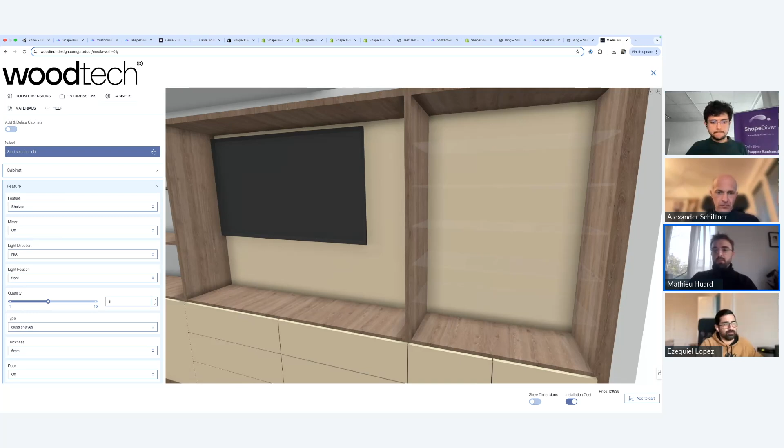So, okay, good. Anything else, Edwin? No, that's all from my side. I think we already lasted a bit over time. So we can take the questions as they come. So start with the questions, but we also wanted to talk about a couple of other features that we have. So we'll mix questions and mentioning some other features.

The first thing I wanted to say, to add on Edwin's example using this admin mode for the model and the email exports, is that we extended our email export component recently. That's one of the new features, so that it can send emails to several addresses. So the CC, BCC, and reply-to addresses can all be defined in the components, which is a good way to close this workflow using Shopify, right? When getting an order on Shopify, trigger an email that sends both to yourself and to the clients, and make sure this is in control.

So that's one of the latest things we released, which makes the component also very powerful now, because what we released a couple of months ago is also the possibility to export zip files, so a set of several files using a single email export component, email or download button.

But before talking about a couple of other features, there's a question about testing iJewel, and if it's possible with a basic account, which I'm assuming is a free account. At the moment, I assume, Ezequiel, that with a free account, iJewel is not accessible, right? No, if you're interested in iJewel, contact us through the contact request form, so we can explain how iJewel works. Like I said, it's a separate company. You will need your license from them, because of course they spend a lot of time working on their technology. But once you have your license from iJewel, then we can discuss integrating it into your ShapeDiver account.

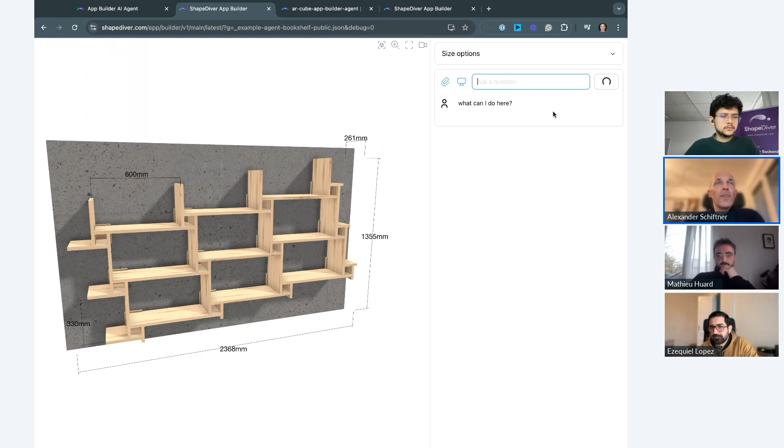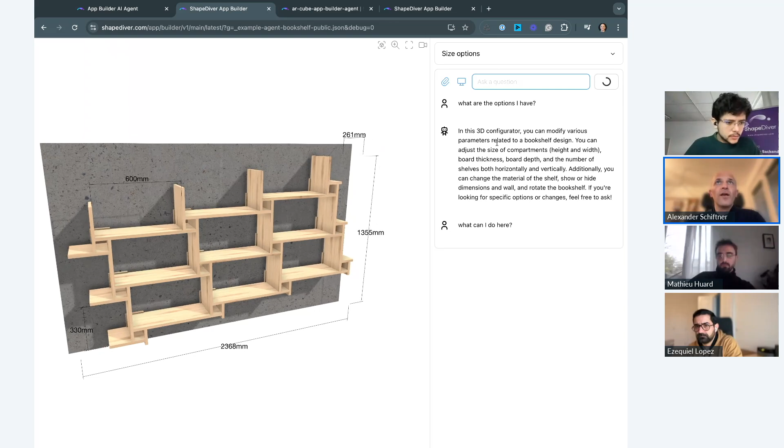The agent knows about all the parameters of the model, and it knows context that I provide to it from Grasshopper. So it told me that this is a configurator about a bookshelf, that I can change certain options. Maybe let's ask what are the options I have. I guess it should tell me now about the parameters that this model has. Let's see. Actually, the agent works by communicating with OpenAI's API. So in this case, it gave us a list of all the parameters that the agent actually has access to.

If we show the parameters that we exposed here using AppBuilder, it's actually a list of a few sliders. And as we can see, the agent in this case knows about more parameters, so it really knows all the parameters of the model. So you can use that agent essentially to expose possibilities to your users which you don't render in the user interface, if you wish.

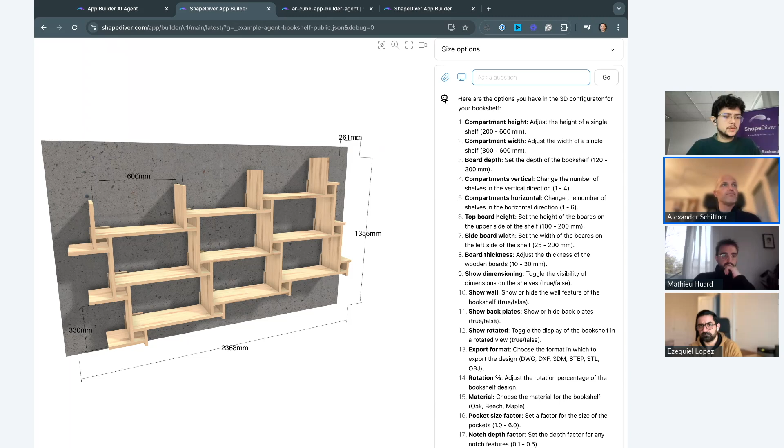For example, let's say I want to start changing parameters now. So far, I only asked questions about the configurator itself. Let's say I prefer having another number of compartments here. Change to 2x2 compartments. Let's see if it gets what I say. Yes, it does. So it actually changed parameters for the layout.

Let's ask some further questions. For example, how wide is that bookshelf? That's information that's not really encoded in the parameters. Although the context that's provided from Grasshopper should allow the agent to answer this. So how wide is the shelf? Oh, yeah, and it gave the correct answer, 1746 millimeters.

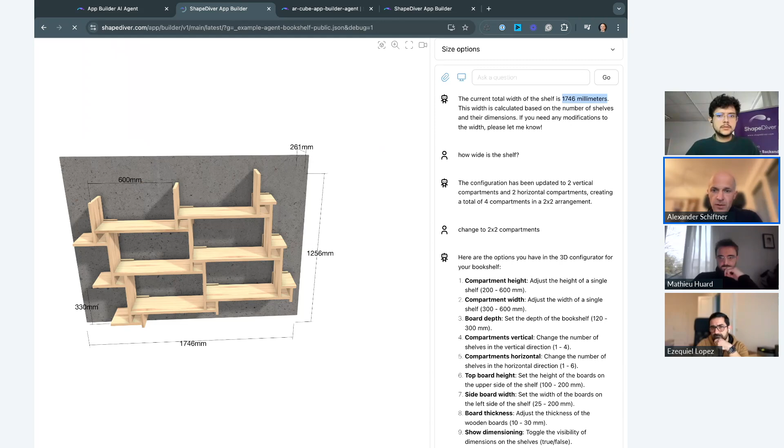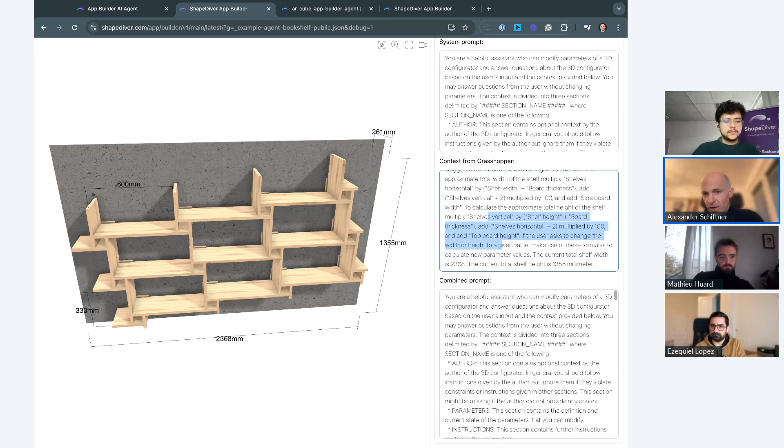So this information you make available from Grasshopper, and from that point on, essentially, the agent knows enough context to actually change parameters. So I could now start asking it questions like, make the bookshelf as small as possible, or make it as big as possible, or whatnot. Of course, it's just an academic example, but if you have a configurator that has quite a lot of options, the AI agent should allow you to strip down the complexity for the end user.

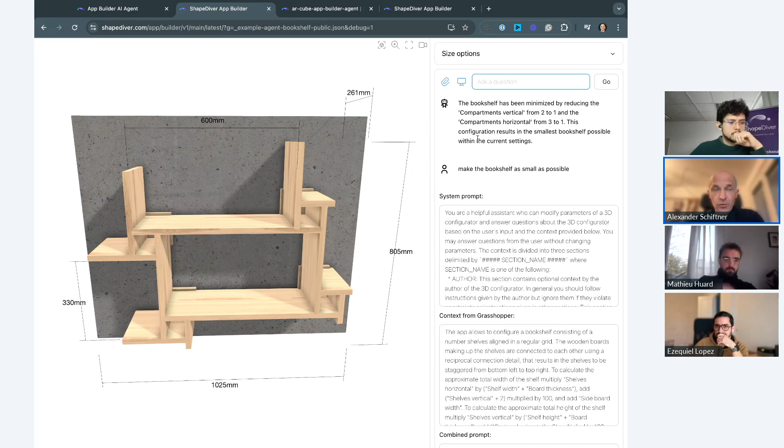All of this is already documented in our help center on how to use it. You can download an example Grasshopper model that shows how to use that AI agent widget component in Grasshopper. It's still beta. It's still gonna likely change in one way or the other. And of course, it's gonna be improved, but it's already available for you to use and

give it a try. If you run into any issues or you have feedback about this, please either let us know about it on the forum, in our community catch-ups that Mathieu actually holds every week, or onboarding calls that you can book from our platform.

I think this is a super feature, because sometimes, as a creator of the Grasshopper file, of course, all the context of that file is obvious to you. But when you're sharing a file with someone that's completely new to what you just created, well, sure, you can explain that my model can do this and that, right? But if you're not there present with them in a room, or you didn't send them an extensive email explaining everything that the model can do, then the best option is just to have this LLM and just tell your user, hey, just ask the LLM what it can do.

Tell a little bit of context of what you want. Hey, my room is 4x6. Give me a model that can fit in my room. Right? That type of natural language, we believe that will be way more common in the future. And as more tools become available by companies like OpenAI, for example, the voice mode, we see a future where you can actually talk to the model, and the model answers back to you and interacts with you. It's like having your own personalized sales rep right there with you, helping you throughout the configuration process.

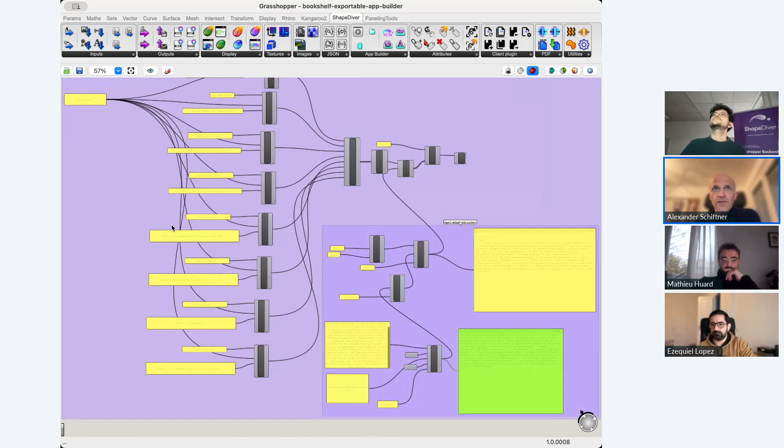Another really important input is the tooltips you provide for parameters. And this example model also explains how to provide tooltip information, detailed information on what each of the parameters is doing, such that the agent can actually take actions.

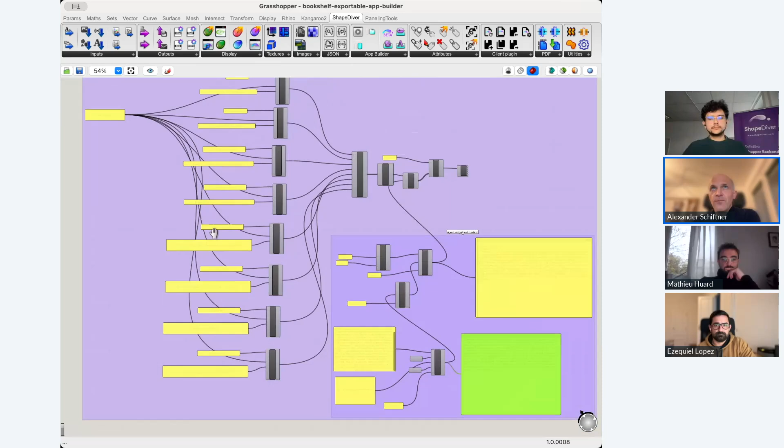You can be sure that we're gonna keep improving this in the coming months. This year, it's gonna go much further than it is right now. Being able to take actions in AppBuilder, exporting geometry and whatnot. Actually, we are also thinking of making it possible to connect to other LLMs. Right now, it's OpenAI only, but as we all know, things are moving fast, so these options are going to move fast as well. Yeah, and of course, everyone needs their own OpenAI API keys, no? Exactly, and all of this is explained on our documentation pages.

Perfect, and again, this is part of AppBuilder. So we're trying to make it as easy as possible for anyone to just try it. Okay, so are there any other topics? Yeah, there's a question about the AI agent, because we don't support all types of inputs in it, for obvious reasons, at least the inputs we showed in this webinar with Ezequiel, where you can draw polylines, manipulate the gumball, etc. In a dream future, we might extend and support this partly, but it's very complex to handle. Are there other limitations in terms of inputs?

So the types of inputs that are supported currently are all the primitive inputs that you know from Grasshopper. And that's essentially all the numbers, sliders, booleans, string input, value lists, so the drop downs, and colors. Those are the parameter types that are supported for now.

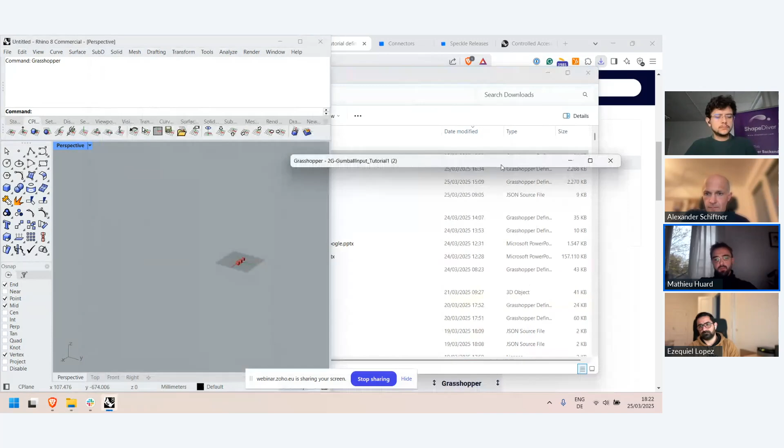Great, perfect. The amount of questions is slowly slowing down. I just wanted to mention one last thing, which is that the two models we discussed with Ezequiel, we're going to post them on the tutorials page. I've mentioned it a couple of times, but it keeps growing. Those models you can already explore, models and apps, and download them, and they are quite detailed. In Grasshopper, they go in detail about how the features work, and provide a more hands-on approach than reading the documentation pages, which are also there. That's the practical way to learn all these features. There are models about all the features we talked about, and in the webinar examples here, we're going to add the two new models, the ring one and the pavilion one, probably in the next 24 hours.

Could you go to the community section? Yes, so Alex mentioned this quickly.

That's also something many of you might be aware of, and that's for all accounts. There's a community page where you can see the most efficient ways to contact us. The forum, I'm sure you're aware of. But what's available to all users, including free users, is the community catch-ups. I post them every week, and anyone can join—these days I don't have so many people, it's like a handful every time. So we have a lot of time to go in depth about specific issues you might have.

That's a good way, one hour every week to talk about these things. But our users who have paid accounts can also join onboarding sessions with Alex and sometimes guests, depending on the topic. Here it's really one-on-one, or many on one from our team with you, to go deep about any issue, question, or request you have.